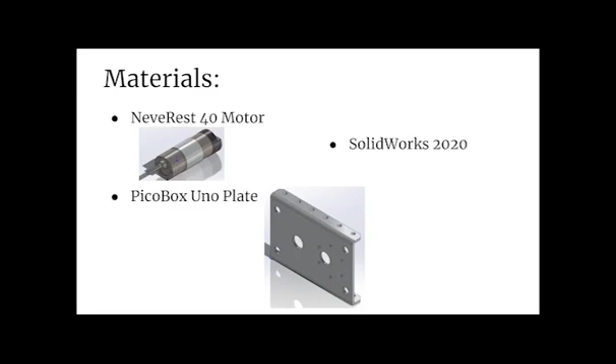The materials you're going to need are the NeveRest 40 motor and the PicoBox Uno Plate, which you can find on AndyMark, and we're also going to be using SolidWorks 2020, the latest version. This is what we're going to be mating today. Mating helps for bigger projects, to make them look nice, and it makes your life easier in terms of not having to place a lot of things.

So we're going to start by opening the assembly. If you have recently downloaded or imported the two parts, they should just be on the side. If they're not, you probably need to look for them a little bit, but they shouldn't take too long if they're named.

There's the motor. We're not going to place the motor first because SolidWorks has a tendency to not let you move the first object you place. So we're going to place the PicoBox first, because it'll be a lot easier to move the motor around rather than the PicoBox.

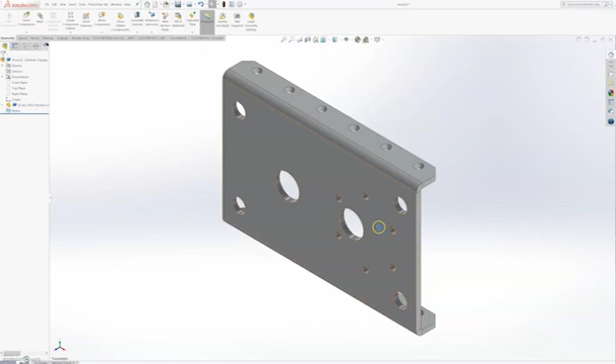So I just left-clicked to place it, and then I'm going back into Insert Components to find the motor and place it here.

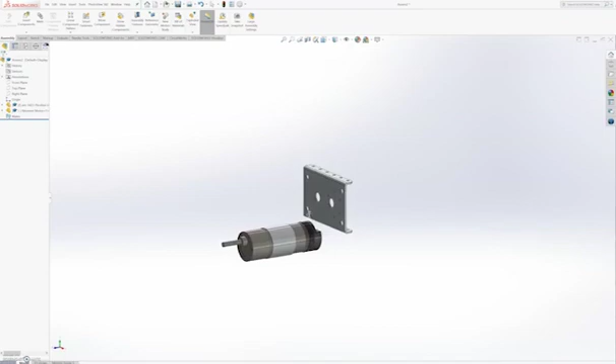Next we're just going to left-click for the motor to set it down, like we did with the PicoBox. The motor is backwards currently to how we want it, so I'm going to right-click, go to Move with Triad, and rotate the motor on the x-axis all the way around. You don't have to get it exactly 180 degrees, it's just more helpful so the mating doesn't mess up. Now, as you can see, it's flipped around.

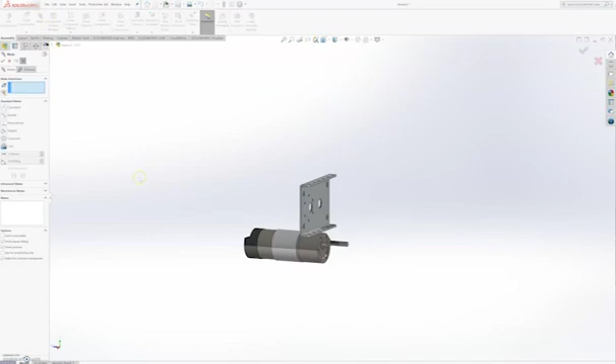We're going to go into mating, which is that upper little paperclip thing, and we're going to click the faces that we want to mate. We want to mate that front face of the motor, and mate it to that side of the PicoBox. It's kind of like paper clipping two papers together — you want to make sure that they stick.

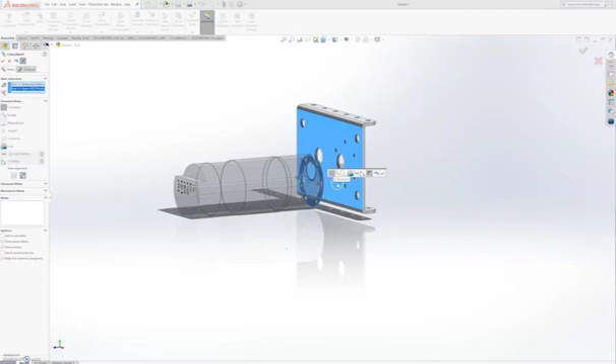When you do that, you can see all the different types of mating. We're going to stick with coincident. So you click yes, and then click the check mark.

As you can see, the motor is still moving on the PicoBox and not quite staying in place. So we want to make it stay in place — it's still underdefined.

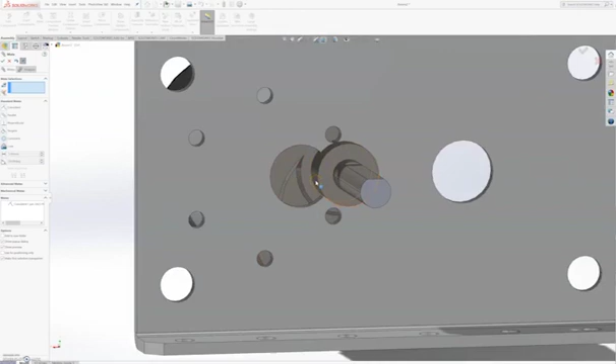So this time we're going to line up those two holes in the housing. We'll click the outside of the housing, that little round part of the cylinder, and then click the inside portion of the circle. That's going to line them up. This time I believe it's concentric, if I'm not mistaken, and you're going to say yes to that, which keeps it in place.

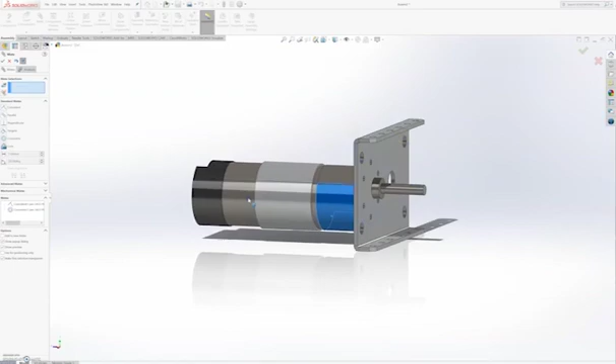However, the motor is still underdefined, as you can see it's still just going around in a circle, which isn't good. You don't want your robot to just be going around in a circle constantly with the motor — that's not good for anyone, and it's not going to stay in place there.

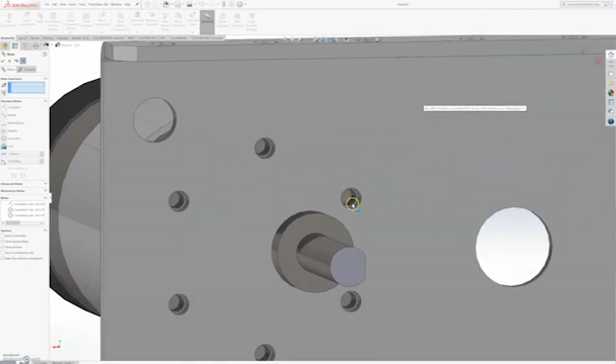So we're going to line up these holes. If you rotate it enough, you can see the holes through the drill holes, and we're going to line them up. We'll click the inside of the motor holes, and click the inside of the PicoBox holes. I like to do it with both sides — sometimes it doesn't like me when I do that, but it's okay if you don't.

So now the piece is fully defined. What that means is that you can't move it at all — everything's fully defined, meaning you can't move anything. It's all good. So there's your assembly.

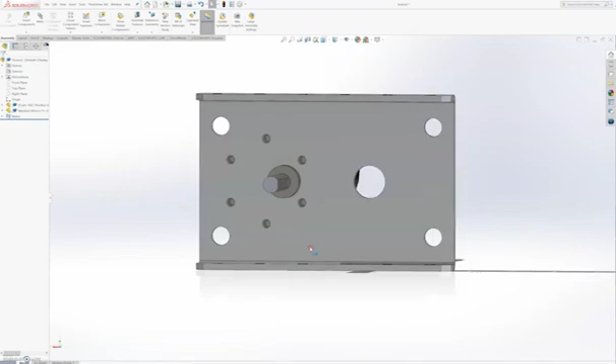You can do this with a lot more things other than just a motor and a PicoBox, obviously. You can also add screws and things, which is nice.

It took me 3 days to complete this. It took a lot longer without me knowing how to mate, so it can help so much more if you know how to do it.

That's pretty much it though. You can use mating on whatever you want to. It'll help you create parts and things, and it also helps you create big assemblies like what the robots are.

It helps to make a more presentable image. It's always really nice to have a whole CAD of your robot — I think it looks really pretty. It makes it easy for you to see all the little parts inside of it, everything that everyone worked for. It's so helpful, and it makes everything look so nice, and I promise you it'll pay off if you use it and if you have the chance to.